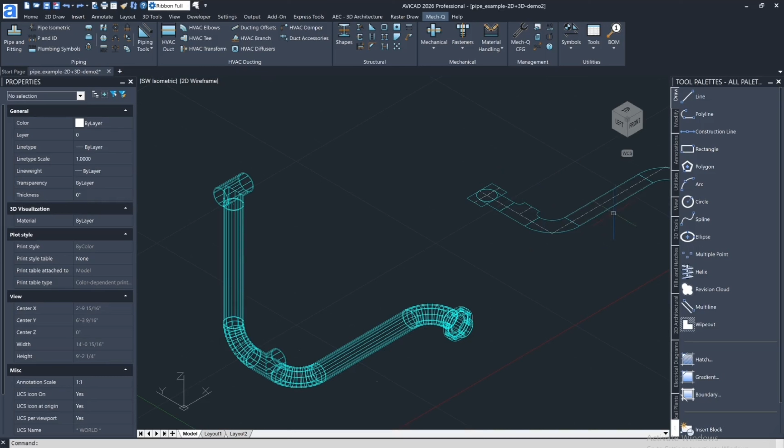Hey, it's Eric with CAD Avenue. Today I'm going to be doing a double input. I'm going to input this 2D schematic here along with the 3D counterpart.

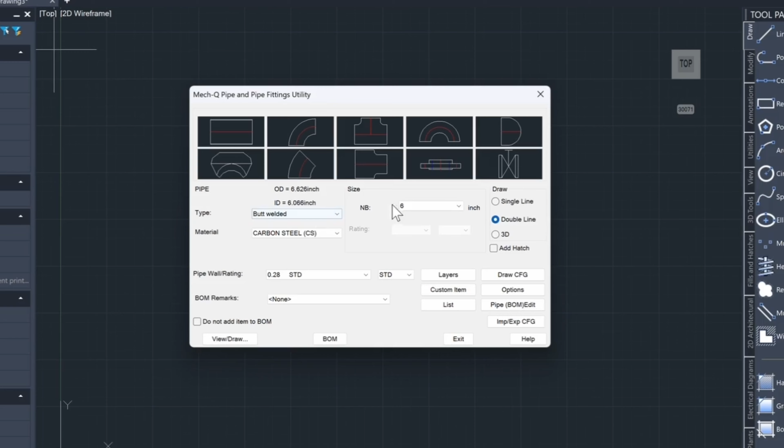Let's get started. Go into a new drawing. I'm going to come up here to the upper left and click this icon, choose OK to the Mech-Q default file. Let's load up the piping. From here, we can choose the straight piece of pipe. We're using butt welded 6-inch pipe, and we have double line selected.

Choose View Draw, and we're going to choose this icon here on the upper left. Click this, then any point in your drawing. Just pick a point here with the left button of your mouse. If you've got a line like this, I call it a rubber band line, you can just click the F8 key to straighten that out.

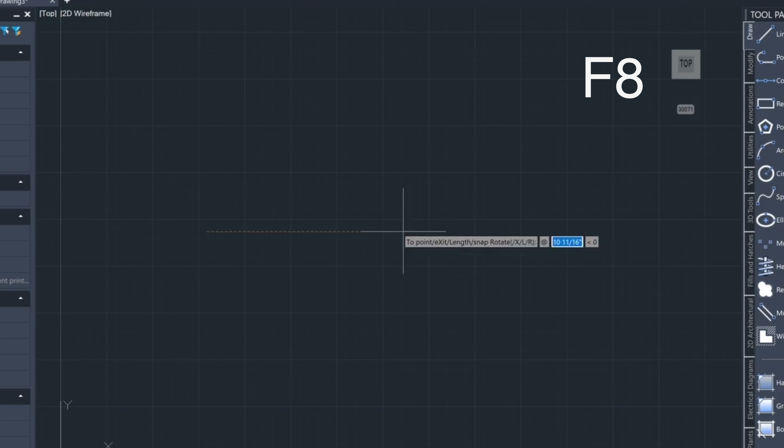Type in 3 foot 9 inches, enter, and enter again. This is going to pull up the mini dialog, and from here we can continue our input. We're going to choose the elbow, and then we're going to choose draw.

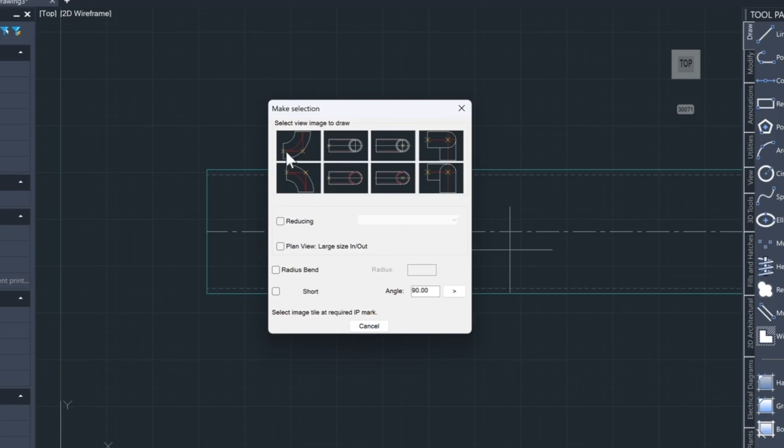We're going to choose this elbow here because we're going to come around to the left side of that pipe. If we chose this one, we would have to mirror the elbow. We'll choose this one, click the endpoint here at the center mark, and choose enter for roll.

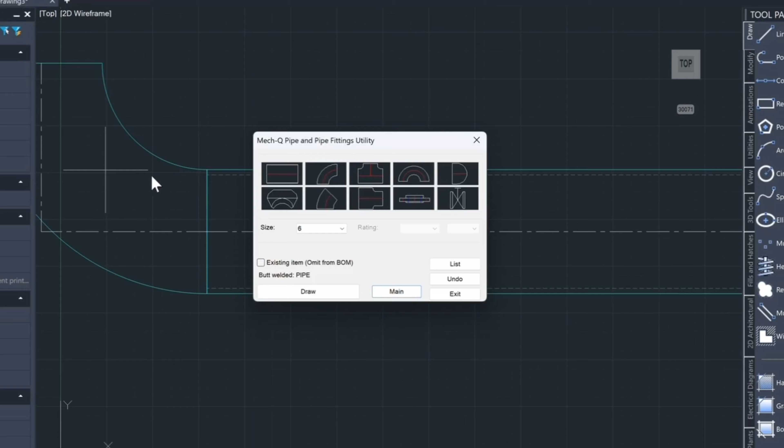From here, we can just rotate it around like this. Let's zoom down on this a little bit so you can see it better. Go ahead and choose the T. You can see here we've got the name of the fitting on the lower left. As you click different fittings, double check that you've got the right one selected.

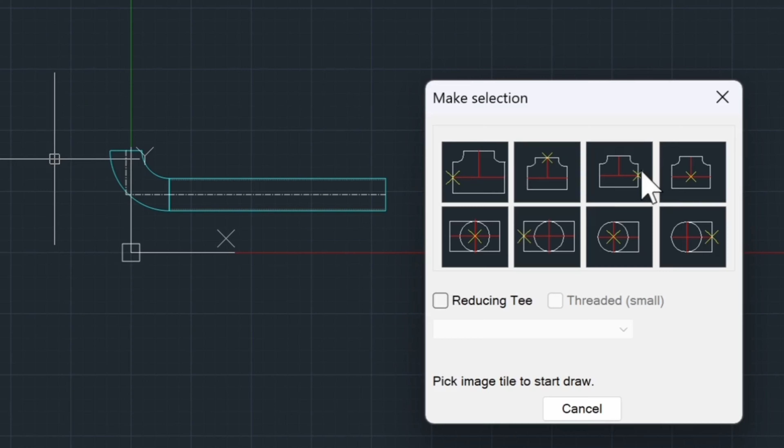And then choose draw. Now in this selection, choose this one because we're going to be inputting it here on the end of that elbow. Then we'll left click, choose enter for no roll, and then we will just rotate it up this way.

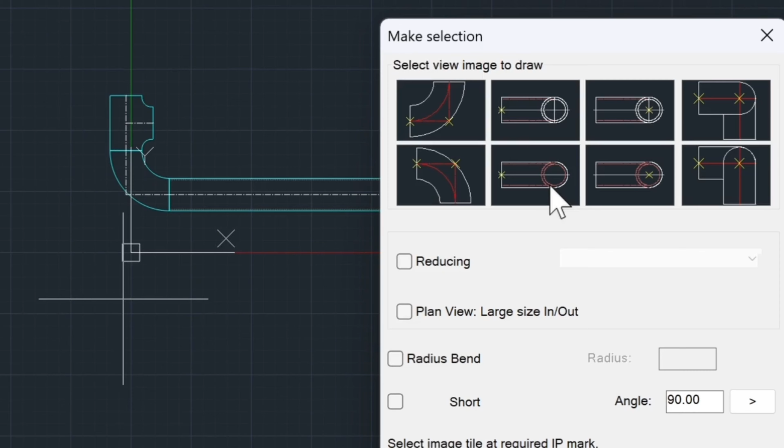Now we're going to choose the elbow again. We'll choose draw. We want this elbow here, the one that's pointing upwards. This one is pointing downwards, so we want this one. We'll go ahead and click here and rotate this up.

Now for the straight piece coming up, we'll click this one. I'm going to choose draw, and we want to choose the riser drop option here. So we'll click this.

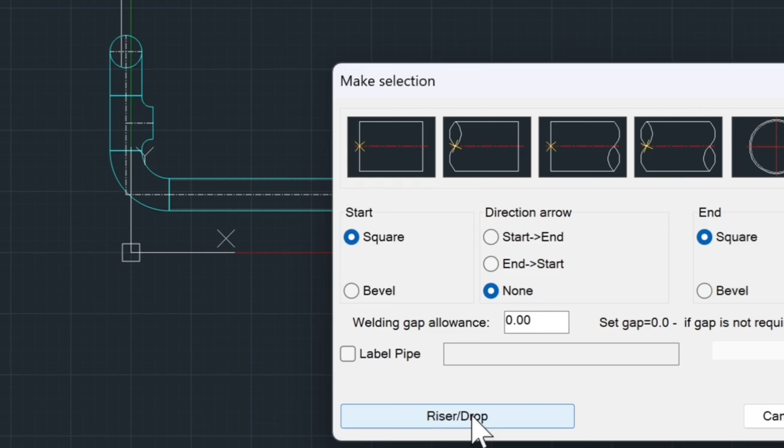Now for the height of that riser, we're going to use 45 inches, or 3 foot 9 inches. We're going to choose draw, then place the insert point here, and exit to the main menu.

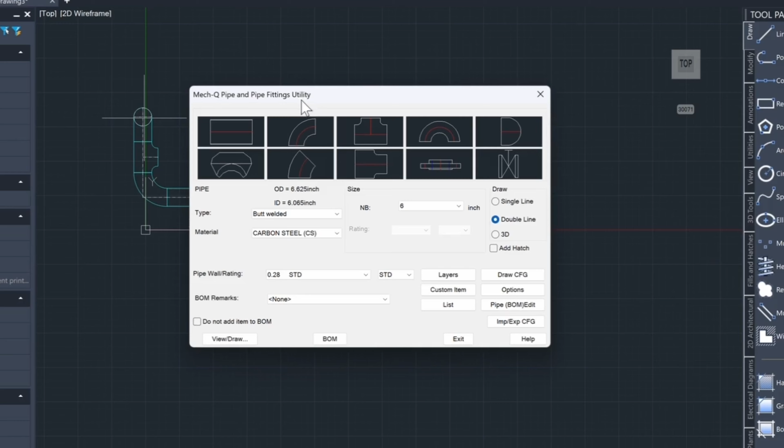Let's just finish the right side real quick. We're going to do the elbow and choose draw. I'm going to choose this one here and put an elbow here. Press enter for roll, and then we'll rotate it like so.

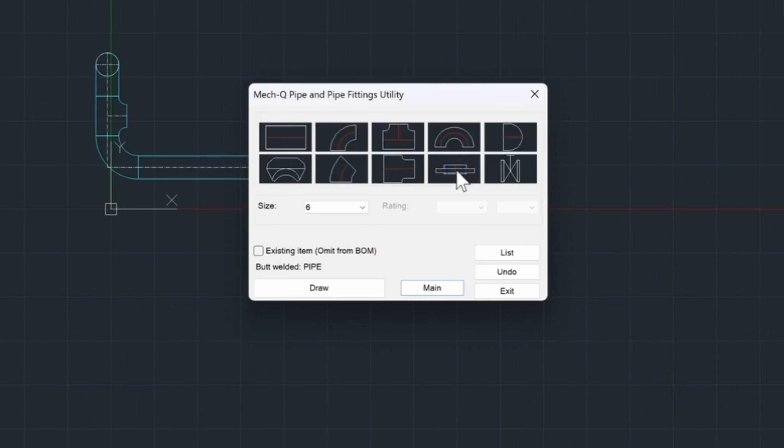And then we'll put a flange. Select here and draw. We'll choose the upper flange, and then we'll go ahead and left click and rotate that in like that.

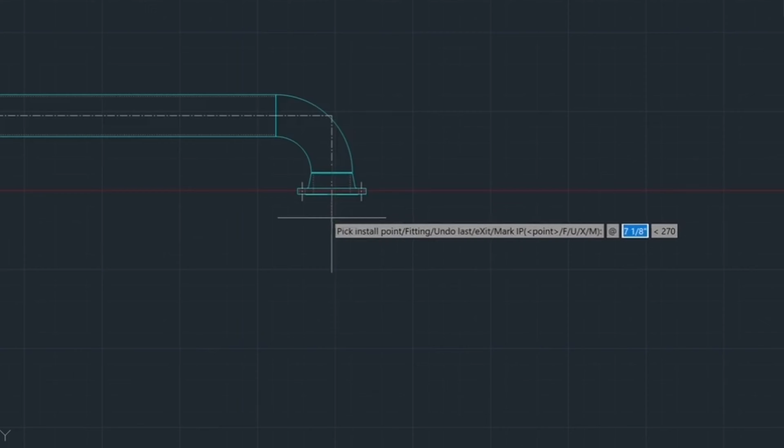Let's choose the flange again to draw the other side. We'll left click, and then we can actually press enter as well to get that last point, and then we'll just rotate it in. One last fitting here, and that's another tee. We'll left click and choose yes to show the branch hidden, so let's choose Y for this.

Then we've finalized this input here.

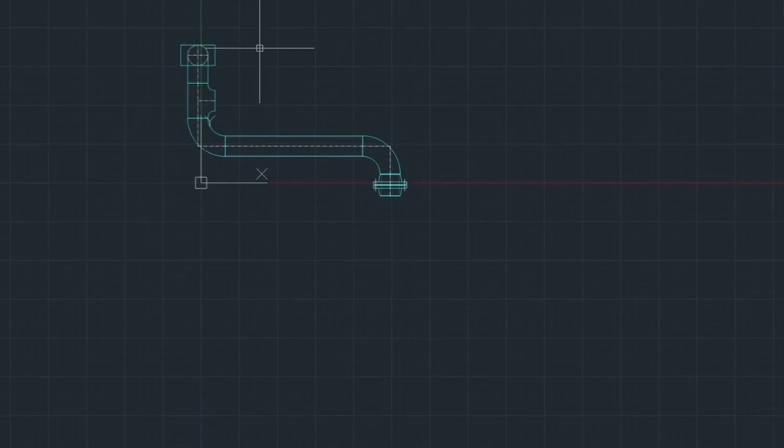So let's draw the 3D version of this input. Let's go into our view controls and we'll select Southwest Isometric. We'll pan up and over.

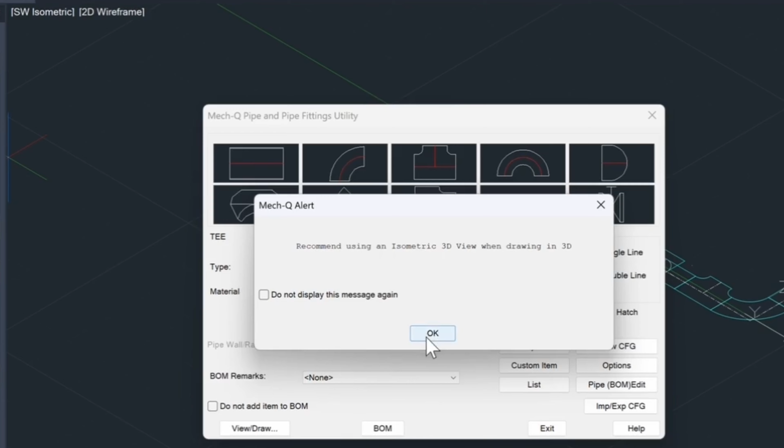Let's load up the pipe utility again. We're going to toggle on the 3D option, and then we're going to choose the tee for this example to start with. We're going to choose it from the center line.

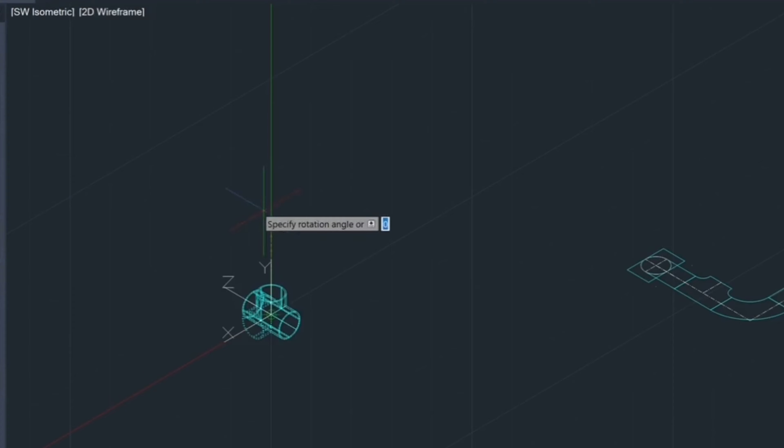And pick a point here out in space. For our upstream direction, we're just going to point it this way, and then we'll rotate it out to the right.

Let's choose the elbow, draw, choose it from this point. We'll snap here to the end. Upstream will be this way. And then rotate it up so it's pointing up.

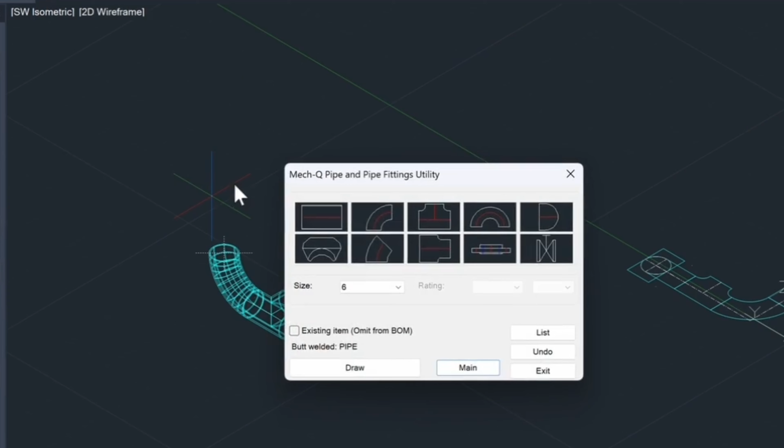And then we can continue on with the straight piece. Choose draw. We can press enter for the last point. And by the way, you can do that with all the fittings. You can always press that enter to find the last point.

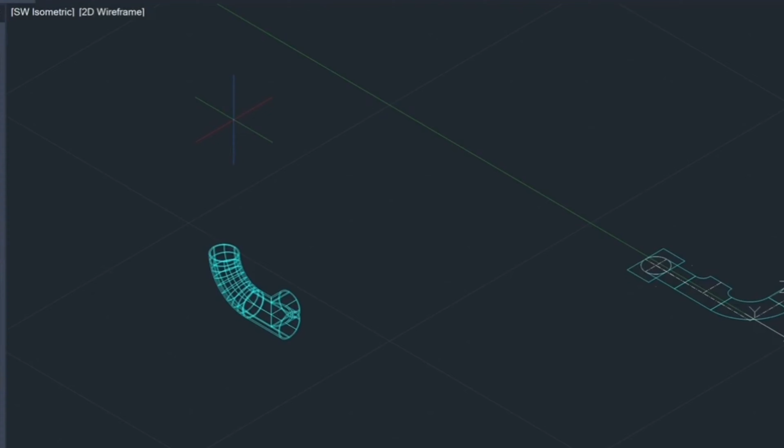And then go up 3 foot 9 inches, enter. And there, put a tee here on the end of it. Draw. We'll select it from this point, select this point here, and then we can rotate it around.

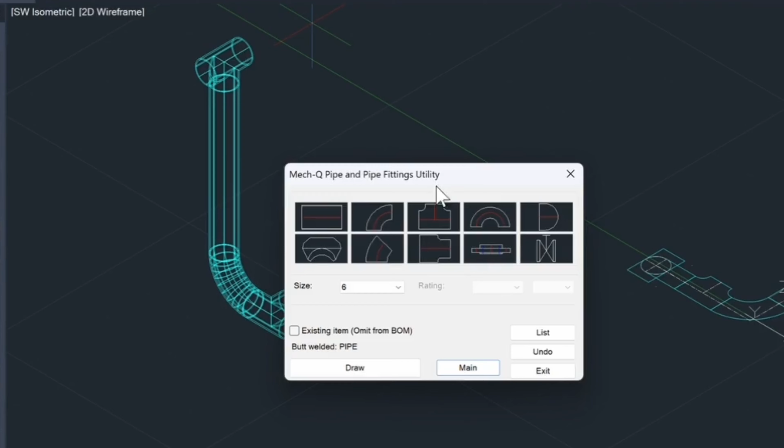Make sure, again, you have your ortho turned on to get those snaps as it's snapping into the 90-degree increment there. Now we need to put an elbow on the end of this, so we'll just select this one.

We'll select it from this side here, and we'll snap to the center. So we'll point it upstream, and then we'll rotate it over this way.

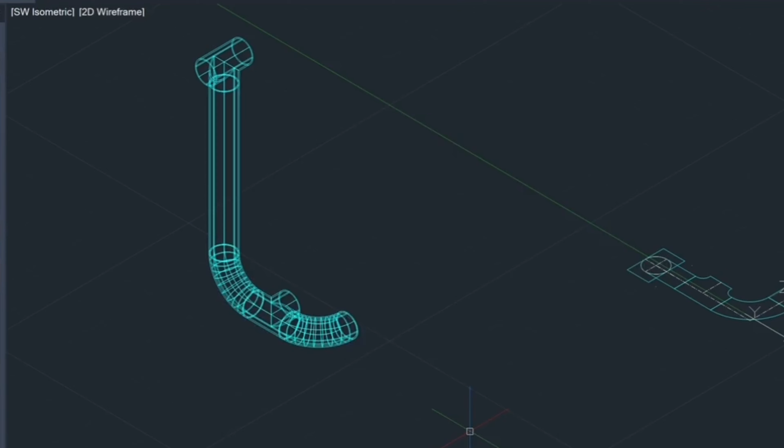Let me show you a little bit about snaps. So if we type in OS for object snap, you can see that I've got these three turned on here. In reality, it's probably good to have the node turned on at the same time when you're doing 3D. That allows us to left click as we see the snap, and then it uses that precise insertion point when we're putting our fitting in. So it's super important to have your snaps activated.

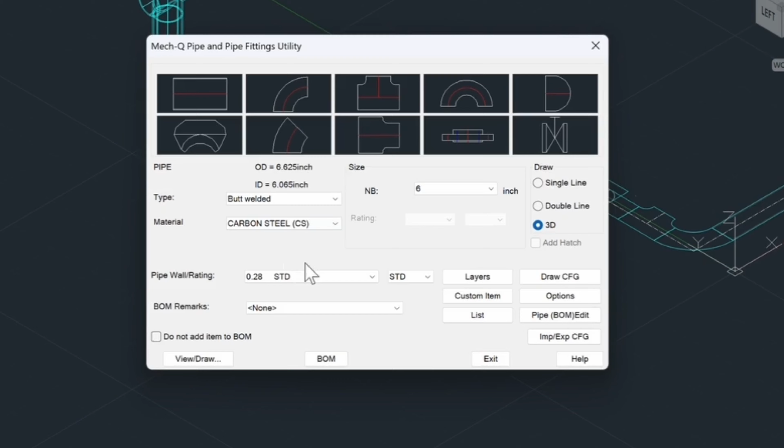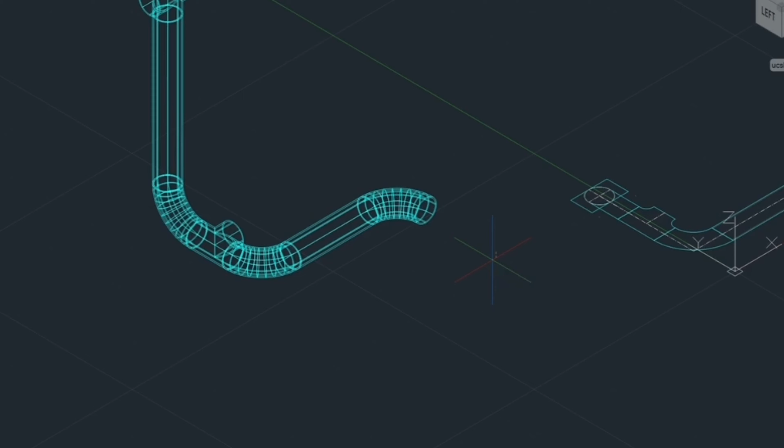Now, if you come up here to the pipe and fitting again, then we'll go ahead and finish this off. Left click here on that, to the center of that fitting, and make sure the ortho's turned on, and then type in the straight piece at 2'9". And then we'll turn it this way so that it puts the elbow in at the same time. We'll press enter.

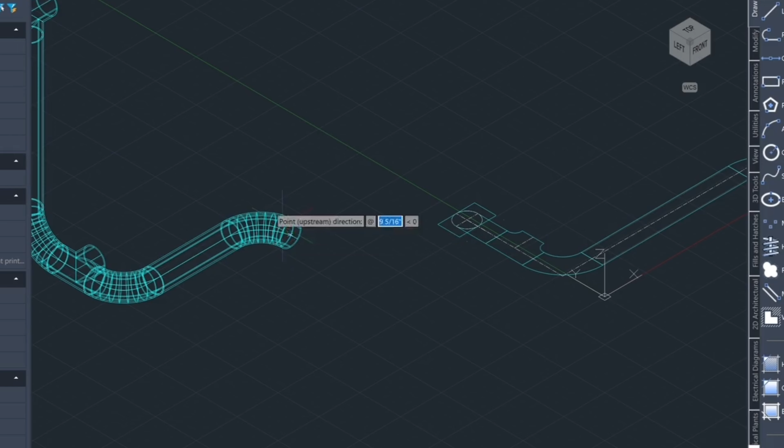Now we can just erase this piece here. And let's go ahead and just put the flange on the end of that. We'll load up the fitting utility again and put on each side. So we'll put this side on. Again, we're pointing it in the upstream direction. And again, we'll put the other one on. And press enter. And that completes the 3D side.

Now, if we want, we can go ahead and shade this. And that's going to give us a rendering of the 3D piece here.

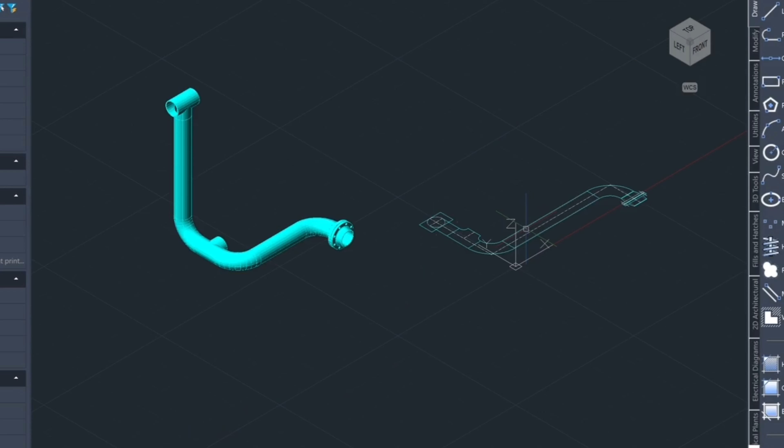Now, in the final part of this video, I just wanted to show you how would you put these two drawings into paper space for plotting. Because we have two different views going on here. We don't want to plot this view along with this one at the same time. We want this view to be in plan view and this one to be in ISO.

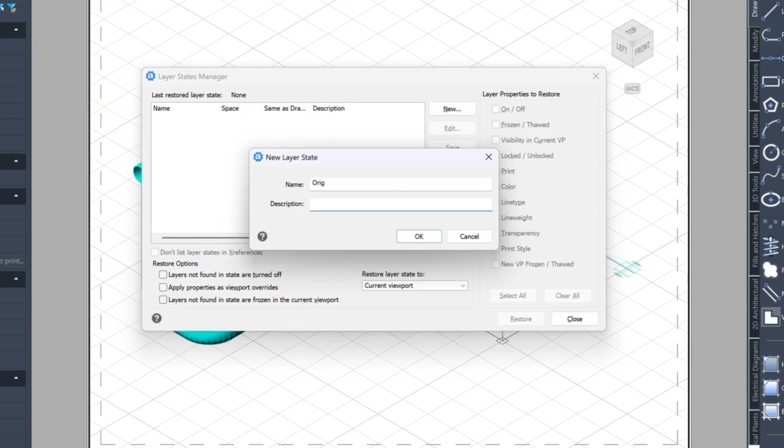So let's go into the layout. I'm going to change the colors of this drawing just for plotting. So there's a command called layer state, and the shortcut for that is LMAN for layer state manager. And what we can do is create just a snapshot of our color so we can revert back to them. Let's just call this original.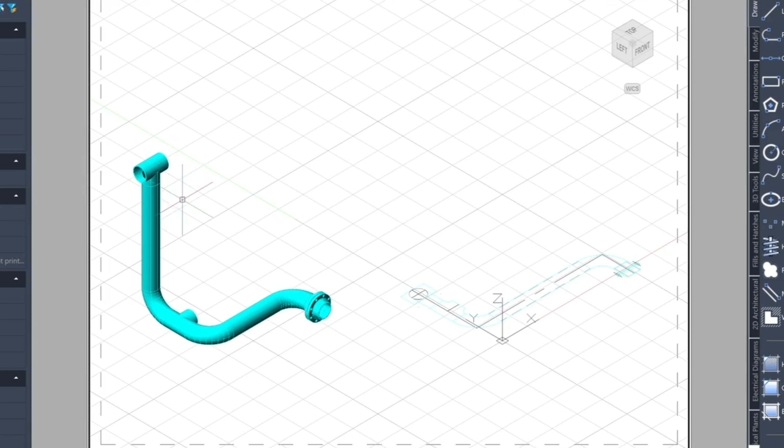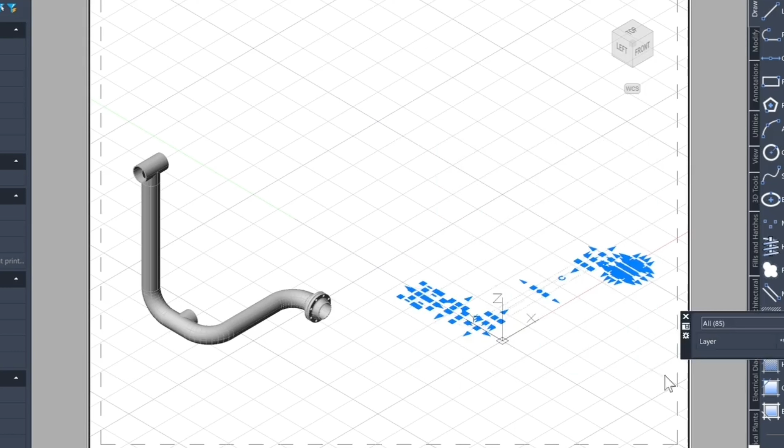But for now, let's go ahead and just double click to activate model space and do a Control A to select everything in the drawing. That's Control A. And for color, we're going to change this down here to select color. And we're going to change this to the off-white here, 254. And for this, we can just go ahead and choose black for this one.

Now go back into paper space. We can just double click out here just to deactivate model space. And we need to create a couple of viewports. Now viewports are ways of creating more than one drawing on a sheet of paper. So we'll choose viewports from the command line here.

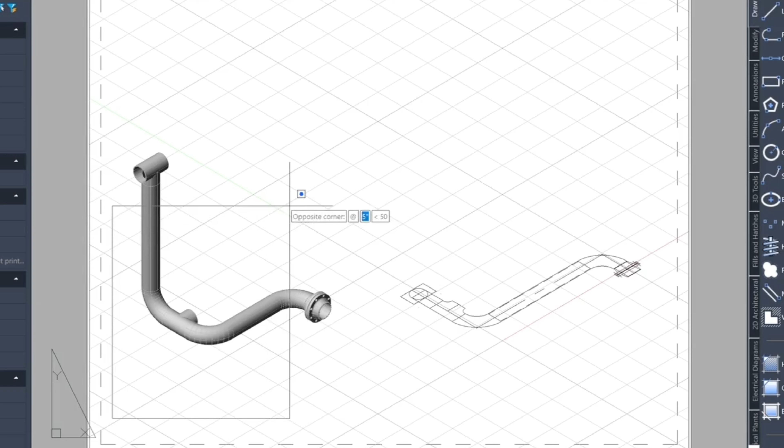It's going to give us some options down here, but what we want is we want to create two viewports, and we want these to be horizontal. And it's asking us for the box, so we'll put this one in here, and then one up here. That's going to give us a total of 3 viewports.

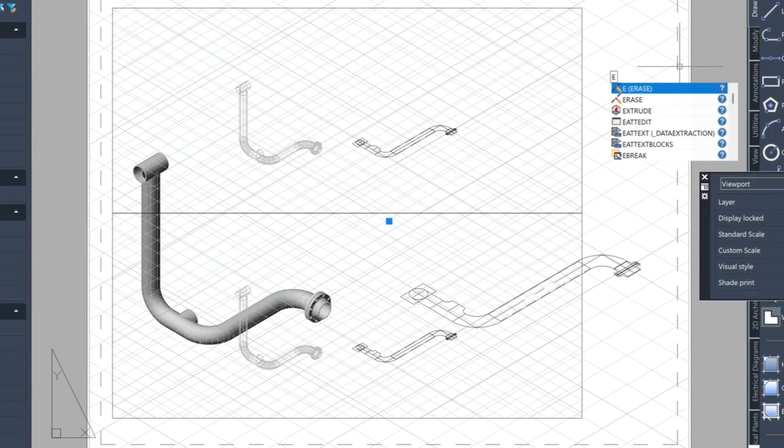So we have one originally way out here. You probably can't see it very well, but if I select it like this, you can see up here that it's a viewport. So we'll just type E, we'll erase that. And now we can just adjust these viewports. So let's just zoom down here into this drawing.

And for this one, we're going to go into another view, top view. While we're in this view, let's just move this model over just a little bit away from the other one so it doesn't plot in this window. You can see it moving in the top viewport as I'm doing that. Let's just zoom down here on this area.

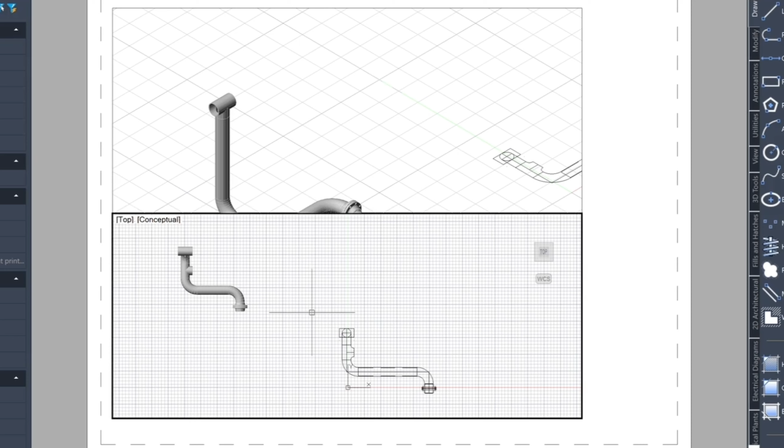Then double click and then just kind of reposition this in here like so. Now we can adjust the actual scale of this drawing. Down here is where we have our annotation scale list. You can choose this and come up and choose the proper scale.

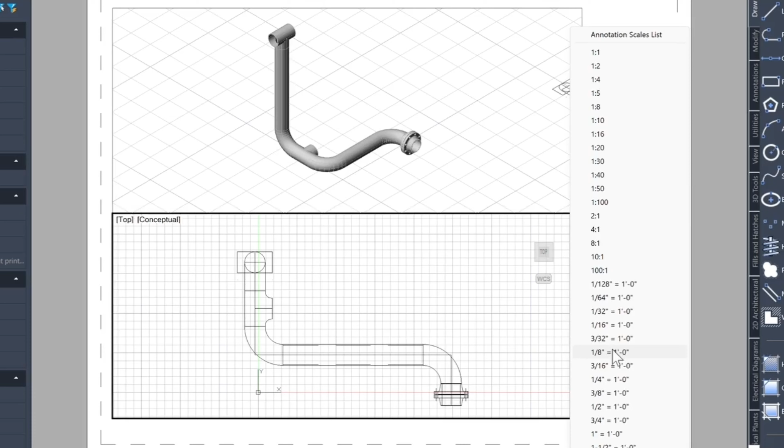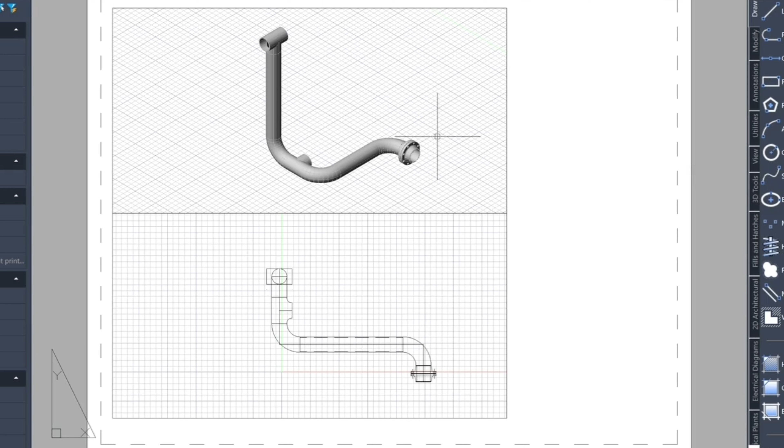Now I'm just going to kind of guess what this might be for now. Let's just choose 3/8. Probably not zoomed down enough. Let's choose 1/2 inch. Now that we have these 2 drawings positioned just right, we can always take these and just stretch them over to the size that we need. We can also double click into each of them and turn off the grids needed as well.

In the next video, I'm going to be showing you how to annotate and create a schedule. And there's a surprise attached to that, so be sure to stay tuned.